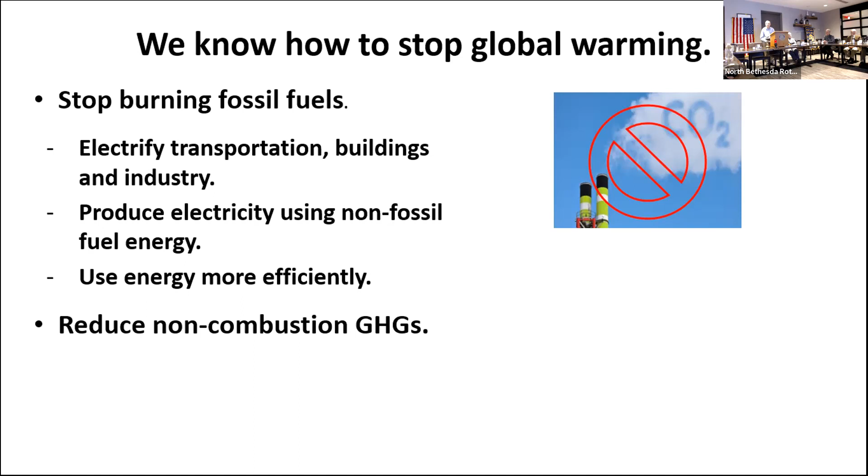Cows belch methane. The cow digestive system releases lots of methane. And one of the common suggestions for reducing the problem is to eat less meat. If people eat less meat, there will be fewer cows belching methane. Less red meat. I think chickens are good things. So we have to reduce non-combustion greenhouse gases. There's a lot of nitrous oxide that comes from fertilizer. We overuse fertilizer, need to use less of it. So that's another solution.

And then finally, we need to preserve, restore, and build ecosystems that sequester carbon dioxide. Trees and vegetation suck carbon dioxide out of the air. They use it to make the bark and the wood and the substance of the plants. So we need to take very good care of our ecosystems that are helping us take carbon dioxide out of the air. So that's basically the overview of how we try to solve the climate problem.

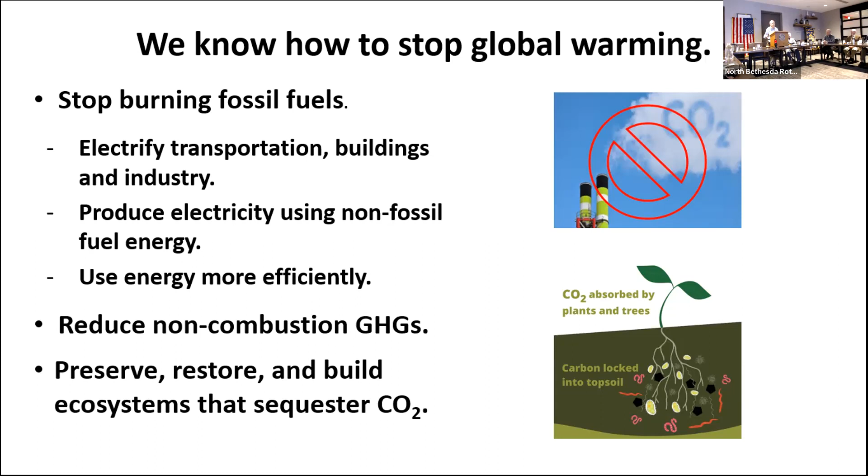And here's how electrification fits in. We need to do all electric buildings, and they produce few greenhouse gas emissions, and they use less energy than buildings heated with fossil fuels. And then we also need to convert our transportation to electric vehicles. They produce no direct greenhouse gas emissions, and they consume far less energy than fossil fuel powered vehicles.

So even though we haven't totally switched to fossil fuel free electricity at this point, I think one of the takeaways from this program is that it still makes a lot of sense to use electric heating and electric transportation. And that is because the electrified building and the electrified vehicles are so much more efficient than fossil fuel powered vehicles or fossil fuel heated buildings.

Quick question. What percentage of our electricity is produced by non-fossil fuels at this point? That depends on where you live. If you're in West Virginia, most of your electricity is produced by coal. And if you live in Wyoming, that's the same thing. Here in Washington, we get our energy from Pepco. Pepco is about 35% nuclear powered and 5% solar and wind powered. So about 40% of our electricity here is from non-fossil fuel sources. So that's how it breaks down.

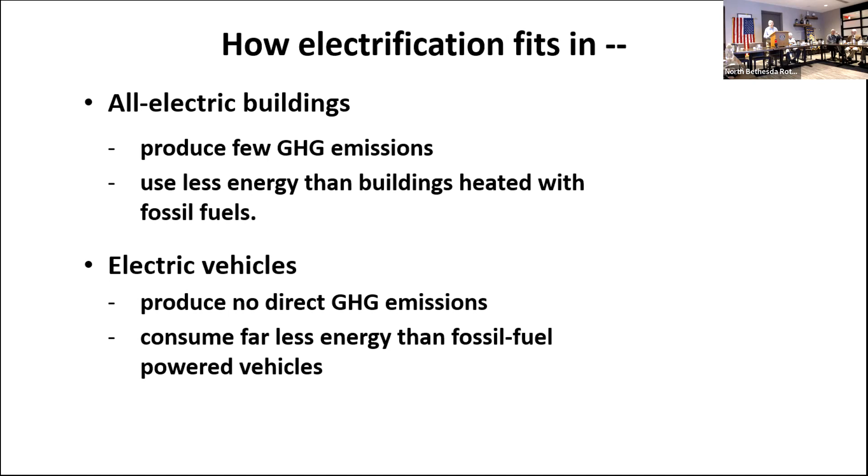Need to go the other way. Oh yeah, okay. So I just made these points so we can go to this.

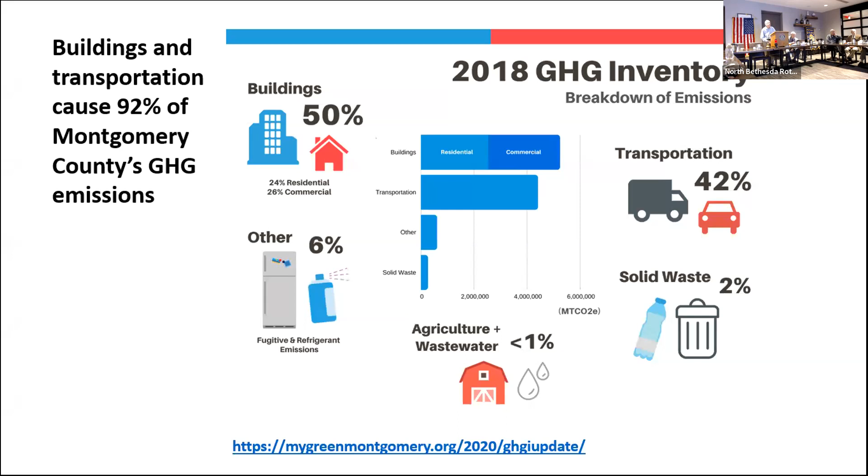In Montgomery County, buildings and transportation cause 92% of our greenhouse gas emissions. So a place to start attacking greenhouse gas emissions is in transportation and in heating our buildings. One thing we can do is replace heating and air conditioning systems with electric heat pumps. People aren't going to do this right away because we've got furnaces with a certain useful lifespan, and it wouldn't be economical to replace your furnace until it's worn out. But when the time comes to replace the equipment, it is very friendly to the environment to replace it with a heat pump. We'll talk about how they work.

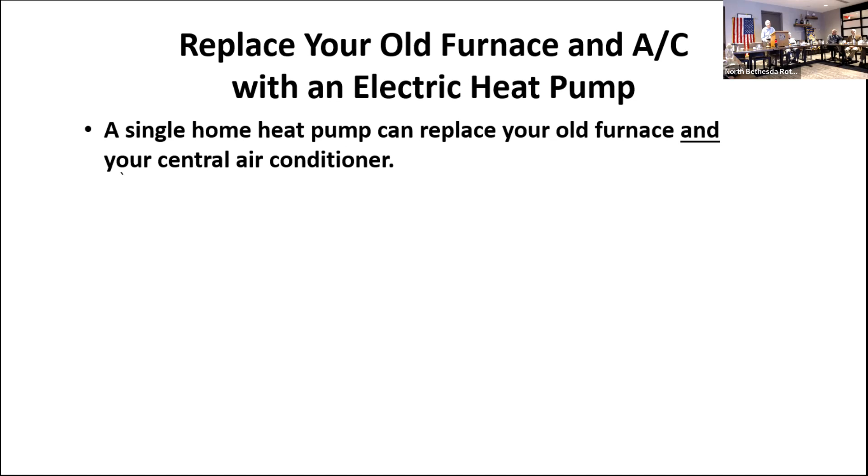There's a 30% tax credit up to $2,000 to help you pay for a heat pump. Advance, please. They're more efficient than a gas furnace. Lower heating bills. No direct carbon emissions. And if you replace a gas furnace with another gas furnace, you are economically committed to putting out carbon dioxide from your new furnace for another 15 to 30 years. So this just ensures that the climate's going to get worse. So when the time comes to replace a furnace, I hope people decide to use a heat pump instead.

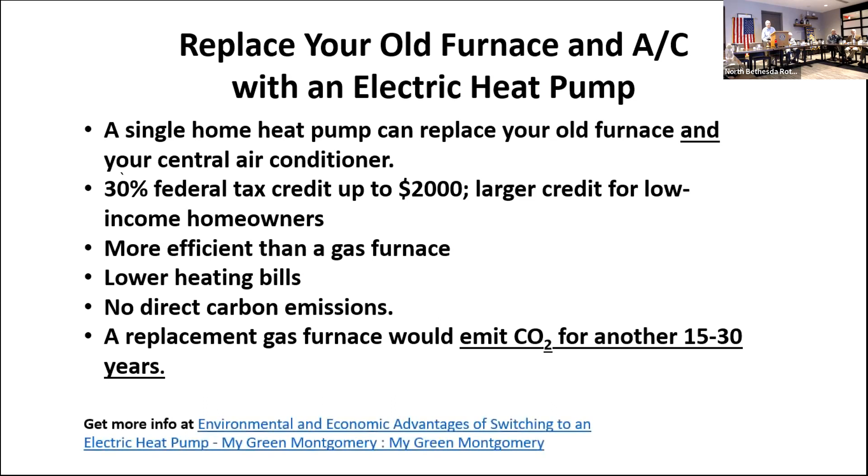Heat pumps can be up to 4 times as efficient as gas furnaces. So gas furnaces, the top illustration here: 1 kilowatt hour of natural gas with most furnaces will produce 0.8 of a kilowatt hour worth of heat. So gas furnaces are at least 80% efficient. Sometimes they get as high as 90 to 95% efficient, but that's the best that can ever be done with the gas furnace, because it's basically taking fossil fuel, burning it, converting it to heat. So 100% efficiency is the upper limit.

Electric resistance heaters, where electric current passes through a resistive wire and that produces heat, can be up to 100% efficient. That's as high as they can get. An electric heat pump can be more than 100% efficient, ideally up to 400% efficient, because the heat pump is not producing heat, it's taking heat from the atmosphere outside of your house or building, and it's pumping that heat into the interior of the building.

So you can think of it as a heat pump. It's a refrigerator that runs in reverse. A refrigerator is kind of a heat pump. It takes the heat that's inside the refrigerator and pumps it outside the refrigerator into your house.

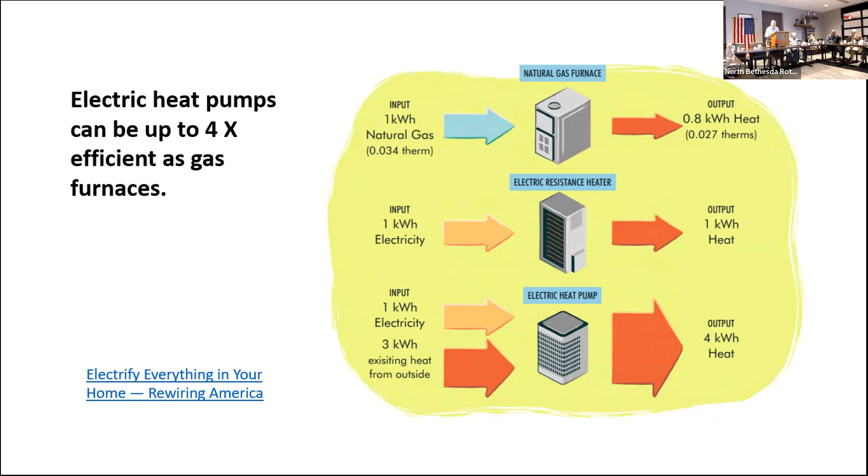There's always ambient heat. Usually, even when it's freezing or a little below freezing, there is still some heat outside that can be pumped into the house, and the heat pump will use an electric motor to do that. And we'll talk about that a little bit if we've got time.

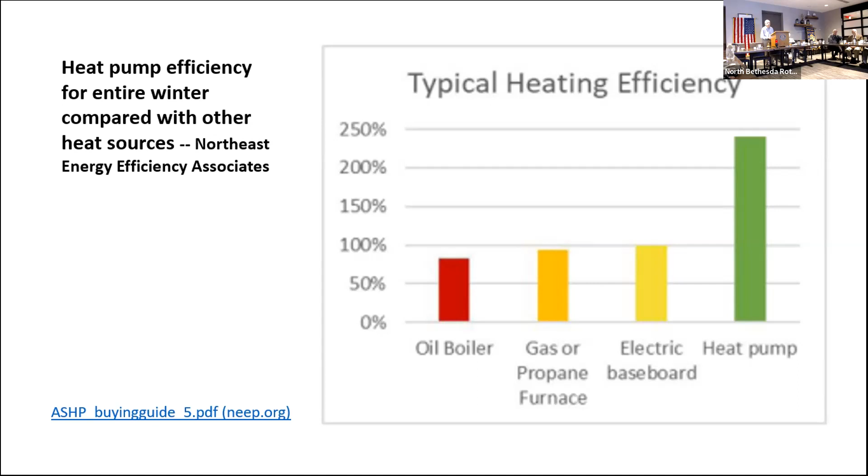How do heat pumps work? So we'll now have a short lesson in thermodynamics. Next slide, please. So heat from the ground, air, or water warms a refrigerant liquid, and that would be on the slide where it says ambient heat: air, ground, and water. Let's talk about an air source heat pump. Heat from the air will evaporate this refrigerant, which is a chemical that has a very low boiling point. That then cycles around into the compressor.

The compressor increases the temperature and the pressure of the refrigerant. So this is what the electricity does. It compresses the vaporized refrigerant, and that will then become a very hot liquid. Then the refrigerant goes through a condenser, which is inside your house or building.

And the heated liquid is much hotter than the temperature inside your house, and heat flows from hot to cold. So the heat will go from this compressed liquid into your house. And then the final step is it goes through an expansion valve, which enables the refrigerant to expand again into a gas, and the cycle repeats. So that's basically how it works.

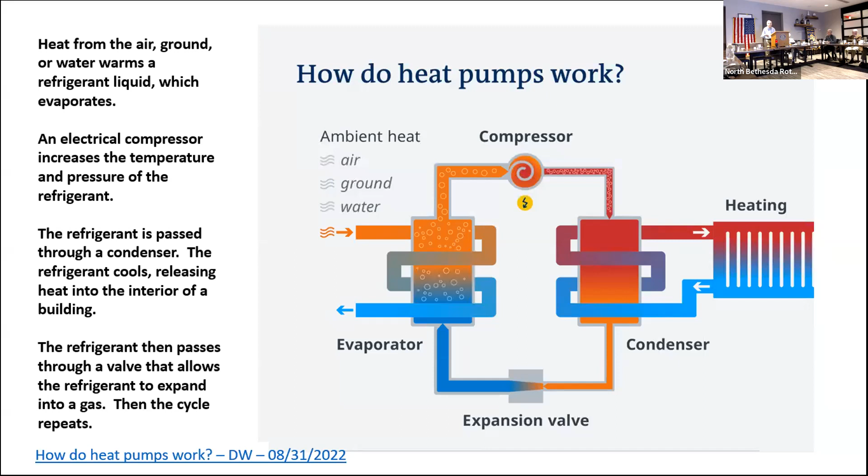The same machine. It depends on the climate, I understand. If you're in a real cold climate, you have to have the auxiliary. It's usually electrical. But they've got heat pumps so that doesn't kick in until below 20 degrees. It used to be they couldn't get that low, but they can now. So in this area, the heat pump is working normally without an auxiliary almost all the time. I was talking to a guy last night who specialized in that. My son sells heat pumps.

The obstacle to transitioning is the cost of gas is so much less than the cost of electricity. Is that it? I think they're very close right now in terms of fuel costs. I think the main obstacle to transferring to heat pumps right now is that the technicians are not so familiar with heat pumps. They've been installing furnaces all these years, so it's hard to find heating companies that really know how to do this. GAC, my company, is now advertising heat pumps, so it is becoming more common. I think the biggest obstacle is the lack of training for furnace installers.

There is another obstacle. For example, I was looking at my apartment, and my apartment was constructed many, many years ago.

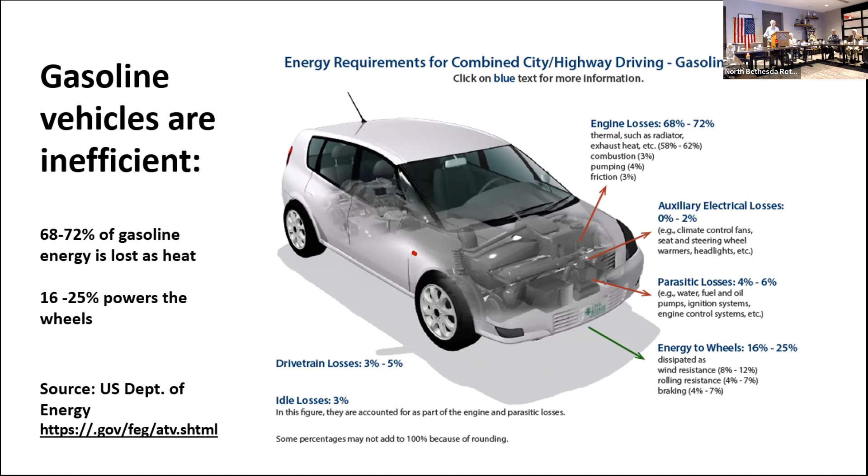They are a lot of fun to drive. The acceleration can be flowing and very, very responsive. So let's go to the next slide. Gasoline vehicles are inefficient. 68 to 72% of the gasoline's energy is basically lost. It's heat that the motor generates, throws off, goes up in the air. So mostly you're wasting the energy in the gasoline, and only 16 to 25% of the energy actually goes to powering the vehicles.

Let's go to electric cars. Electric cars are 87 to 91% efficient. And in addition to the inherent efficiency of an electric engine, electric cars have regenerative braking, which means when you put on the brakes, or even if you take your foot off the accelerator, the electric engine basically turns into a generator and converts the energy of the motion of the vehicle into electrical energy. So instead of a regular brake, which just basically uses friction and heats up, puts heat into the air, the electric vehicle saves that energy, stores it up in the battery, and it is used to increase the car's efficiency.

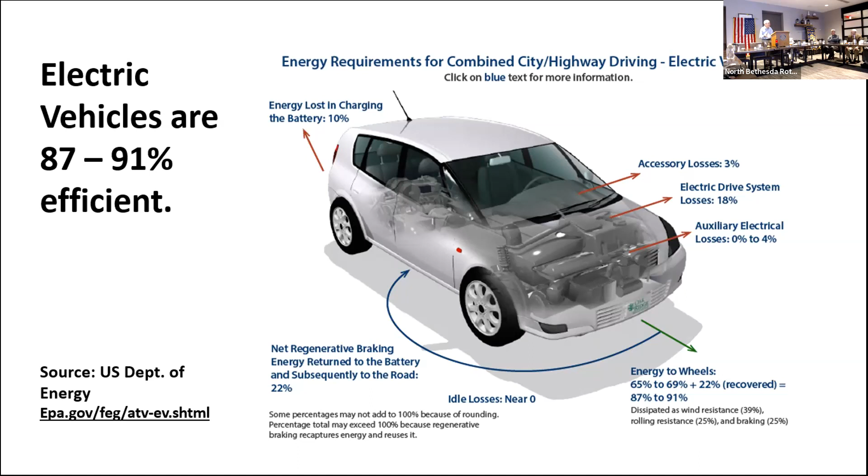So let's go on. Let's skip this slide. I don't want to go into too much detail. There are four kinds of vehicles actually. All electric, which just runs on batteries. Plug-in hybrids, so that's a hybrid vehicle like a Toyota Prius Prime, where it has a gasoline engine, but it also has an electric engine in it, and you can plug it in at home to put electricity in the battery. So that's a combination of electric vehicle plus a hybrid. A hybrid vehicle is something like a Toyota Prius, which has a gas engine, but it also has a battery and the ability to generate electricity by braking. And then pure gasoline engines.

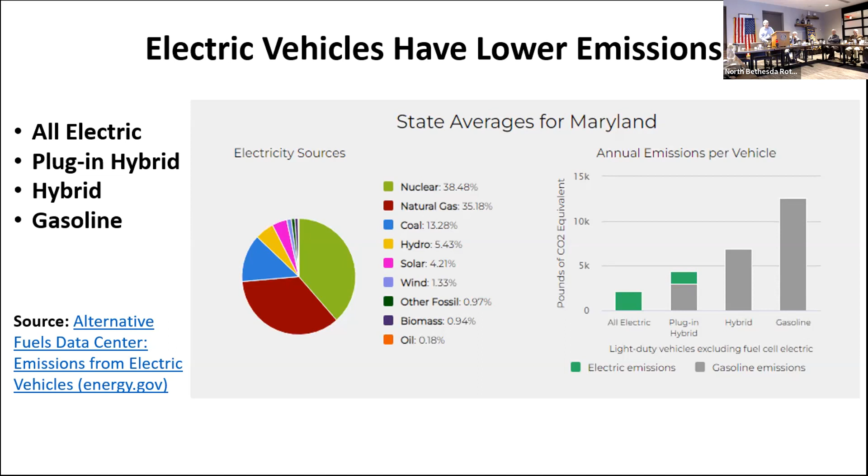And the chart on the right shows state averages for Maryland. So we start out on the left of the bar chart. An all-electric vehicle has got the lowest emissions per mile. And all of those emissions, which is the green part of the bar, are the emissions from the electricity that went into powering the vehicle. Plug-in hybrid, you can see it has a lot more emissions per mile. It still has some emissions from the electricity, and then most of the emissions come from burning gas. Then you have hybrids, and gasoline engines, of course, have the most emissions per mile.

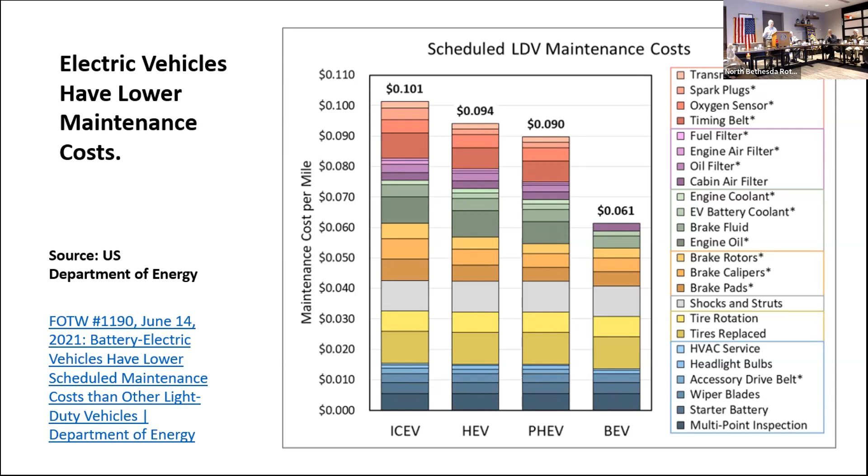So when you need to get a new car, furnace, hot water heater, or a clothes dryer, consider electrifying. You'll save money, you'll reduce emissions that foul the air and heat the planet. And tell your friends and neighbors too, because we need everybody's help to save our habitat.